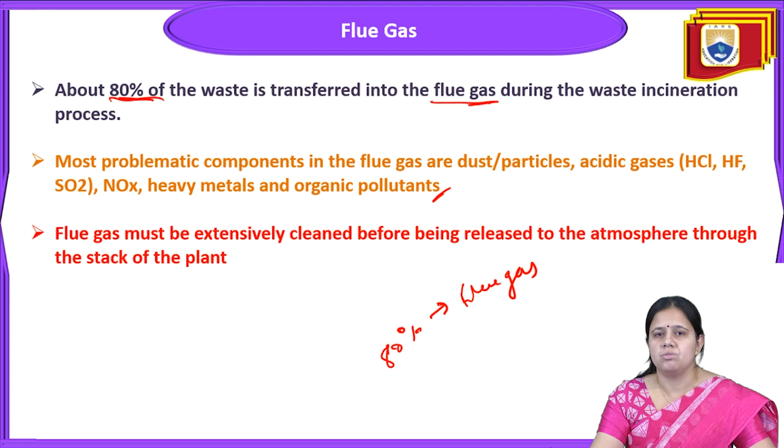Now the next point: which type of flue gas cleaning system is required nowadays? This cleaning system is required to reduce the concentration of specific pollutants to well below the respective air emission limit, so that it comes under the air emission standard. These pollutants can be divided into categories: dust, acid gas, PCDD, or NOx. These are the 4 categories.

Some of these pollutants are in the form of dust, some acid gas, some PCDD, and some NOx. So this cleaning system is very much required to reduce the concentration of a specific pollutant well below the respective air emission limit. And, as I have already discussed, flue gas must be extensively cleaned before being released to the atmosphere from the stack of the plant, so that pollutants, toxic elements and acid gases are not released into the atmosphere.

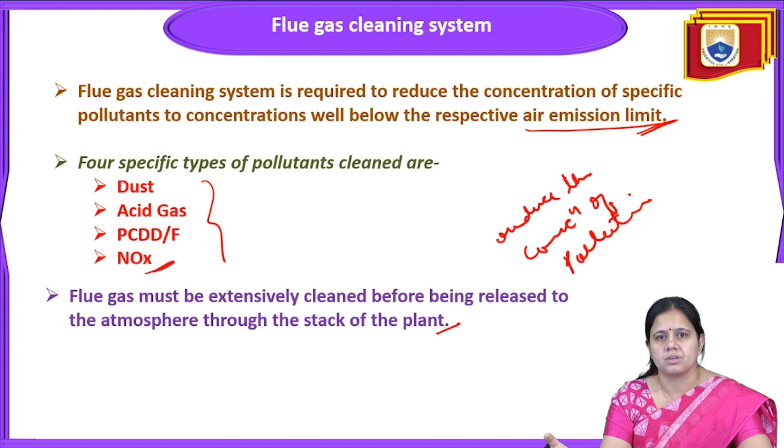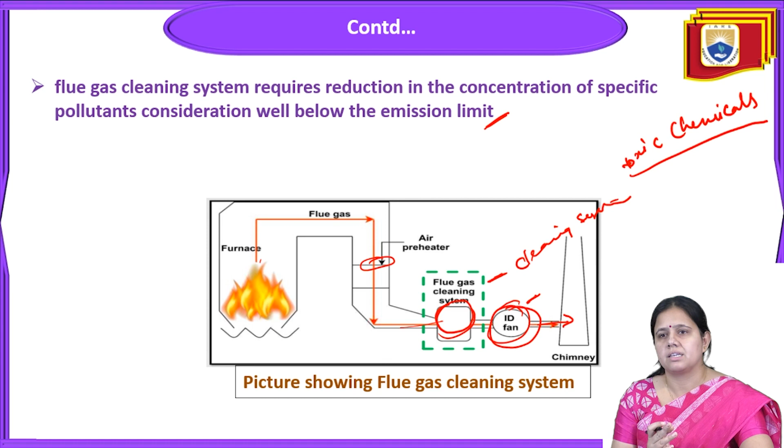Now see, the induced fan is there. What is this ID fan doing? The induced draft fan is the key component of the plant. I have already given you the picture where the induced draft fan is. That fan will draw out the flue gases, and then allow them to enter the chimney, and from the chimney they enter the atmosphere.

So it is a key component in the flue gas treatment plant. It ensures the transport of flue gases from the furnace through all the process steps of the flue gas treatment plant to the stack, and it is located in the back end of the process train. The ID fan also ensures that no polluted flue gas escapes from the process equipment by providing a reduced pressure therein.

Flue gas transport is quite demanding in terms of power consumption, and the ID fan is the largest single power consumer in the entire waste incinerator plant.

So this induced draft fan has been installed in the incinerator plant to ensure the transport of flue gas from the furnace through all the process steps of the flue gas treatment plant to the stack. It is located at the back end of the process train. The ID fan also ensures that no polluted gas can escape from the process equipment by providing a reduced pressure therein. And flue gas transport is quite demanding in terms of power consumption, and the ID fan is the largest single power consumer in the entire waste incinerator plant.

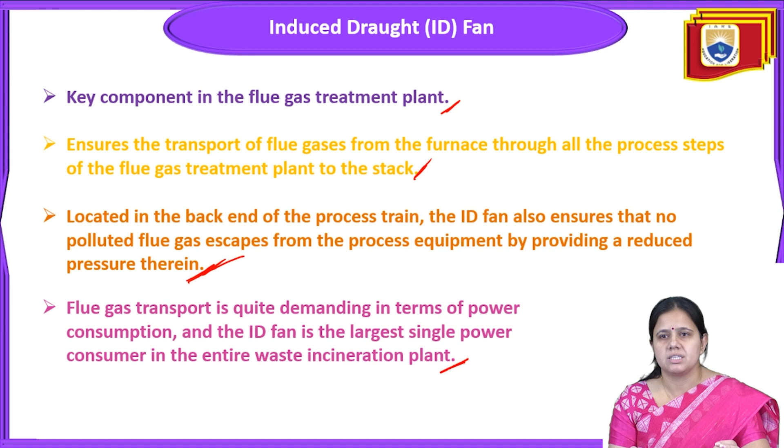And mainly it is located in the back end of the process train. The ID fan also ensures that no polluted flue gas escapes from the process equipment by providing a reduced pressure therein. Flue gas transport is quite demanding in terms of power consumption, and the ID fan is the largest single power consumer in the entire waste incinerator plant. So this is all about the induced draft fan.

Next is the fabric filter. A fabric filter is installed to filter the flue gas. In the fabric filter, the raw gas passes through fabric bags, which are supported by a metal cage. So you can see that a metal cage is there in the fabric filter, and the gas flow is commonly from the outside to the inside. Gas will enter from the outside, and then it goes to the inside.

The dust stays on the outside of the bag and is periodically removed by an air pulse opposite to the filtration direction. Its removal efficiency is 99 to 99.5%, and it can operate up to a temperature of 250 degrees Celsius. So this fabric filter is very effective. So this is a basic description of the fabric filter.

The raw gas passes through the fabric bags, which are supported by a metal cage, and the gas flow is commonly from the outside to the inside. Gas will come from outside, then pass through to the inside, and the dust stays on the outside of the bag. This is shown in the pictures also.

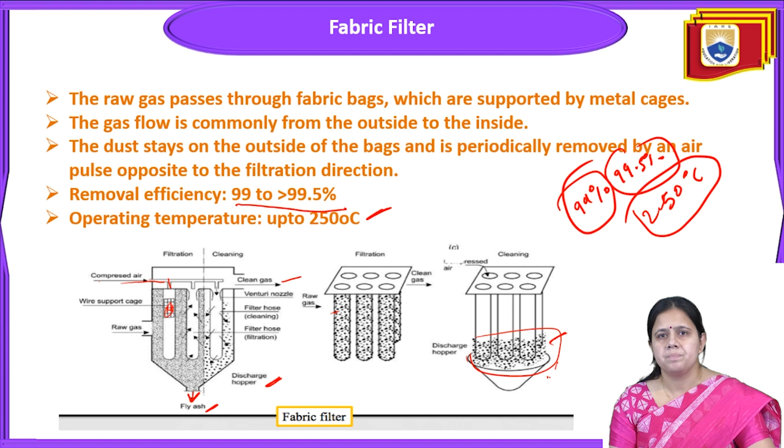The dust stays on the outside of the bag, and it is periodically removed by an air pulse opposite to the filtration direction. Its removal efficiency is also very good, that is 99 to more than 99.5%, and it can operate up to a temperature of 250 degrees Celsius.

And next, the raw gas passes through the fabric bags, which are supported by a metal cage. This is the working principle of this fabric filter. The gas flows from outside to inside, and finally the clean gas comes out, and the dust is on the outside of the bag and periodically removed by air pulses.

It is removed by the air pulse opposite to the filtration direction. The gas flows from outside to inside, and finally the clean gas comes out, and the dust on the outside of the bag is periodically removed by the air pulse opposite to the filtration direction. So from time to time the solids that settle get removed, and with time the dust is collected and removed.

The only problem related with this fabric filter is its operating temperature, which should not be more than 250 degrees Celsius, because these are cloth bags and fabric bags. That's why it will not work at more than 250 degrees Celsius. So this is the only negative point related with this fabric filter.

Otherwise, this fabric filter is very effective in collecting these dust particles. It won't work above 250 degrees Celsius because only cloth and fabric bags are there. Otherwise, it is very good and very efficient, because it gives efficiency up to 99 to 99.5%.

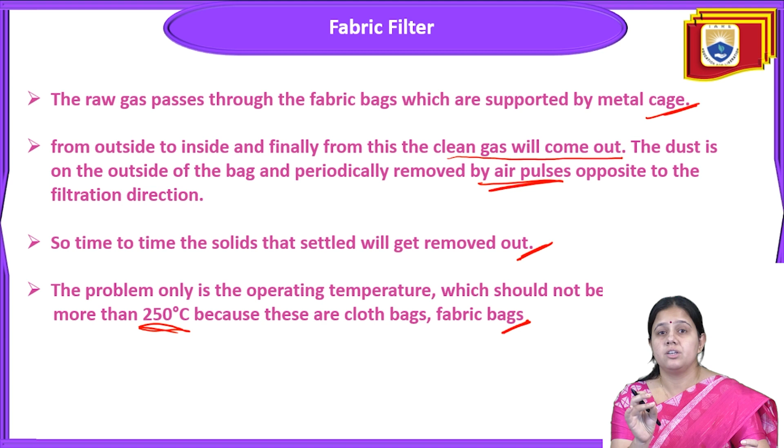Now, the next device is the Venturi Scrubber. The Venturi Scrubber is also installed on the flue gas, which is accelerated to a high velocity by passing a funnel with a reduced cross-sectional area, called a Venturi, where water is also injected and atomized. The water aerosol caused by the flue gas picks up a large fraction of the ash particles.

The working principle of the Venturi Scrubber is like this. The gas is accelerated to a very high velocity by passing a funnel with a reduced cross-sectional area, where the water is injected and atomized. The water aerosol caused by the flue gas picks up a large fraction of the ash particles, and the water droplets are subsequently removed in the cyclonic separator.

If HCl, hydrochloric acid, is present, it dissolves in the water aerosol and reduces its pH, creating a corrosive condition, and needs treatment prior to discharge or reuse. So this is the whole process of the Venturi Scrubber. The flue gas is accelerated to a very high velocity by passing a funnel with a reduced cross-sectional area, where water is also injected and atomized. The water aerosol picks up a large fraction of the ash particles.

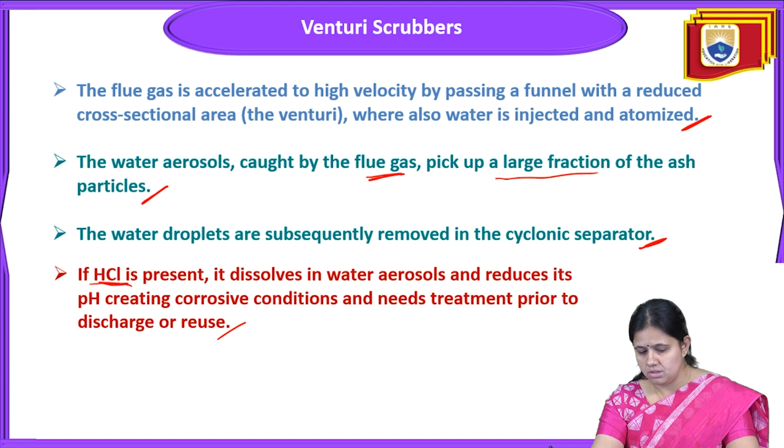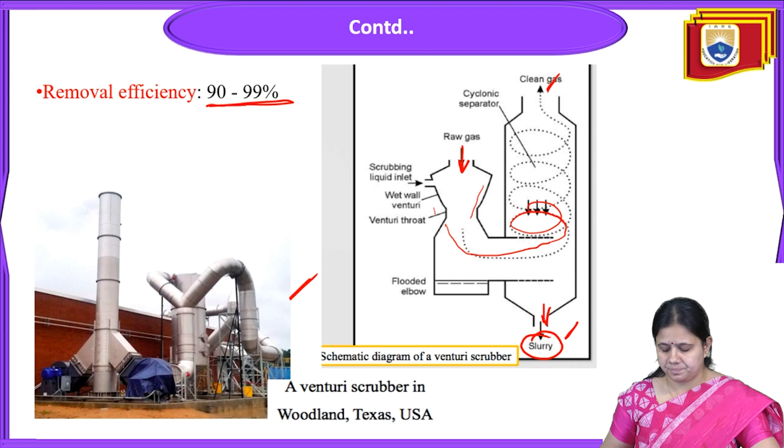And now we come to the cleaning of acid gas. How will this acid gas be cleaned? Acid gas can be removed by a number of technologies, either a wet system or a dry system.

Acid gas can be removed by methods called either wet system or dry system. The wet system is normally applied after fly ash has been removed, typically in the electrostatic precipitator, as I have discussed, and it works on the principle of absorption of gas components into a liquid. This is called the wet system.

The wet system basically involves the absorption of gas components into a liquid. Its efficiency depends on the available surface area of the liquid, which controls the mass transfer from the gas into the liquid. So in the wet system, wet scrubbing is normally applied after the fly ash has been removed, typically in the electrostatic precipitator.

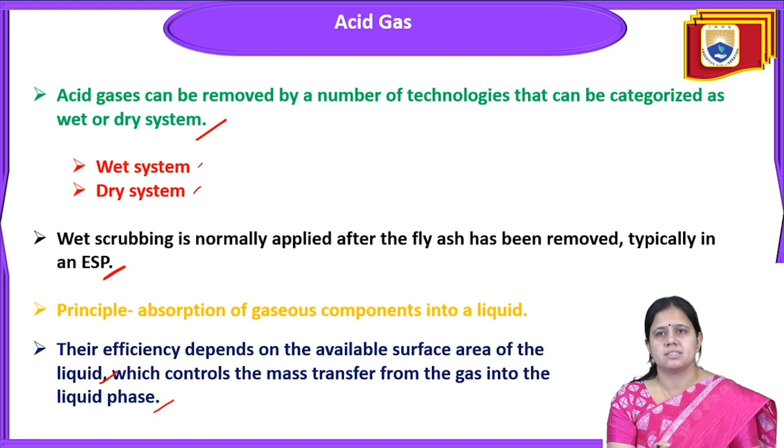It works on the principle of absorption of gas components into a liquid, and its efficiency depends on the available surface area of the liquid that controls the mass transfer from gas into the liquid phase. So this is the wet system related to the acid gas cleaning system. And now comes the dry system.

It is a two-stage installation with an initial acid scrubber that removes HCl, HF and mercury, followed by a slightly acidic or neutral alkaline scrubber that removes SO2, sulfur dioxide. So in an acid gas scrubber, it is basically a two-stage installation where the initial acid scrubber removes hydrochloric acid, HF and mercury, followed by a slightly acidic or neutral alkaline scrubber to remove SO2.

And next, the wet scrubber. Wet scrubbers are often operated with discharge of liquid effluents and require neutralization to neutral pH and efficient removal of any heavy metals or other toxic contaminants.

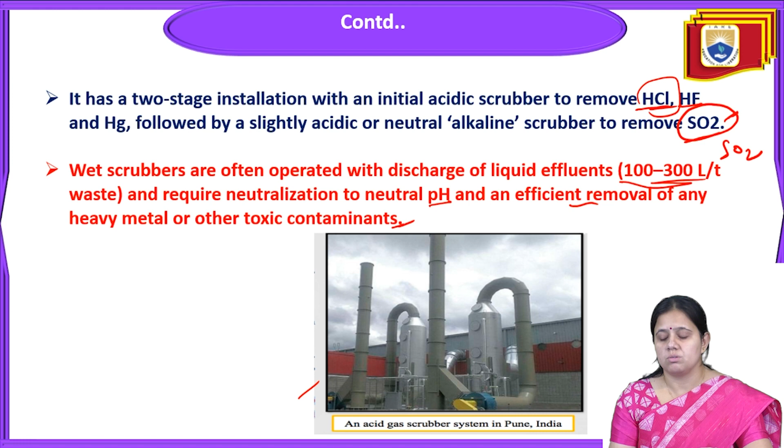that has been installed as a two-stage installation, with an initial acid scrubber to remove hydrochloric acid, HF and mercury, followed by a slightly acidic or neutral alkaline scrubber to remove sulfur dioxide. Okay. Now comes the next point, that is called the dry system.

In the dry system, Ca(OH)2 and NaHCO3 are injected into the flue gas to neutralize it. With the injection of these two, the acidic gas components of the flue gas are going to be neutralized.

In a dry process, the agent is injected as a dry powder, maybe together with water, while in the semi-dry system, the agent is injected as a slurry that dries in the flue gas.

So these two are inserted into the flue gas to neutralize it. After neutralization, we can directly disperse it into the atmosphere, and its toxicity will be reduced. Okay. The next component is dioxins and furans. Dioxins and furans are very dangerous, and how will they be cleaned?

First of all, PCDD is polychlorinated dibenzo-p-dioxin, and dibenzofurans are also there, already present in MSW, municipal solid waste, but they are almost totally destroyed in the combustion chamber.

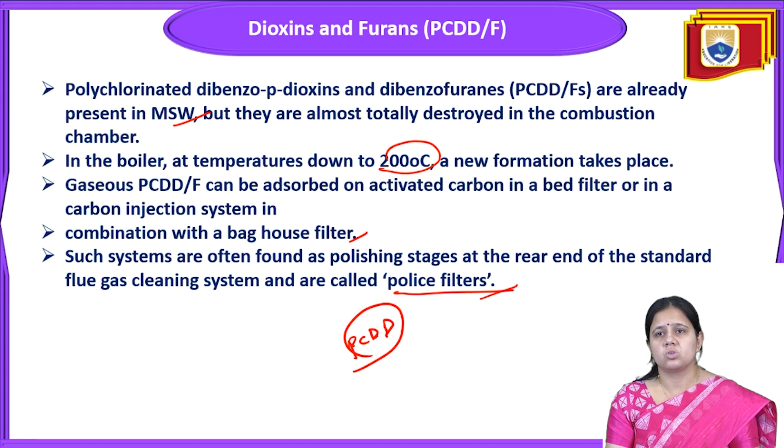Now comes the next component: NOx, nitrogen oxides. NOx includes NO, NO2, NO3 - all considered under NOx. So NOx is a common term for nitrogen oxide and nitrogen dioxide.

In waste incinerators, typically more than 95% of the total NOx in the flue gas is present as nitrogen oxide. If the combustion temperature drops below 850 degrees Celsius, an increasing fraction of the NOx is present as N2O. N2O has an extremely high greenhouse gas potential of 310 compared to 1 for CO2.

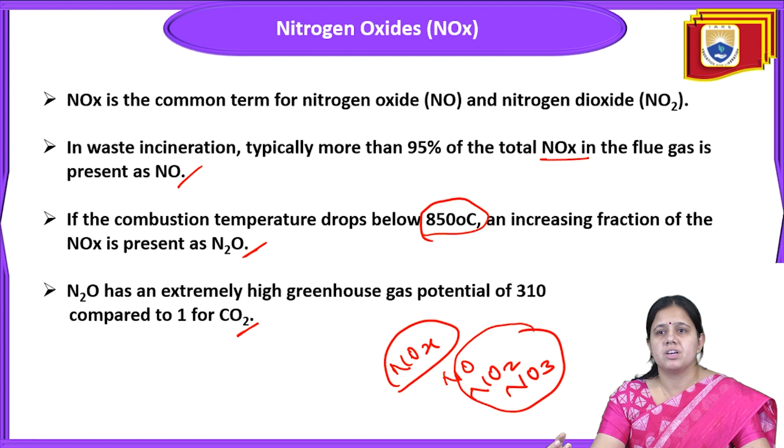N2O is a very dangerous gas with an extremely high greenhouse gas potential of 310 compared to 1 for CO2. If the combustion process temperature drops below 850 degrees Celsius, an increasing fraction of NOx is present as N2O, which is an extremely dangerous greenhouse gas with that same potential of 310 compared to 1 for CO2.

For the removal of NOx, two methods are used: selective non-catalytic reduction (SNCR) and selective catalytic reduction (SCR). SNCR is called selective non-catalytic reduction.

In SNCR, ammonia or NH2-containing compounds are introduced into the secondary combustion chamber of the furnace to reduce NOx to N2. A minor quantity of N2O is also formed. This is selective non-catalytic reduction, using mostly ammonia and some ammonia-containing compounds in the secondary combustion chamber for the reduction of NOx, though small quantities of N2O formed this way may also be dangerous.

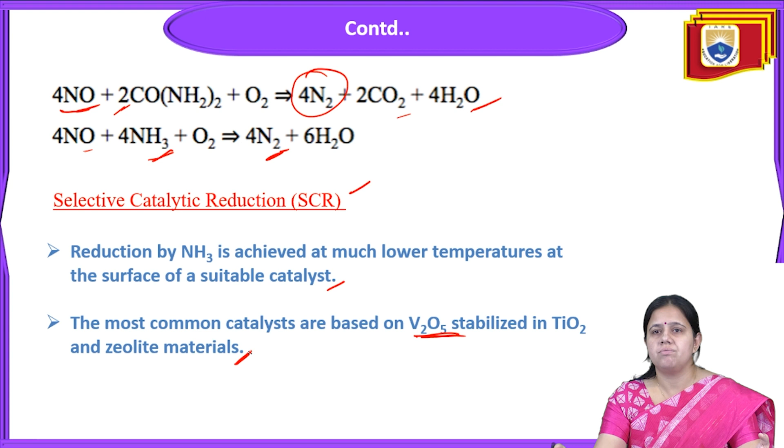In this lecture, I explained the cleaning system for flue gases, what type of equipment has been installed, their efficiency, and how efficiently these systems work.